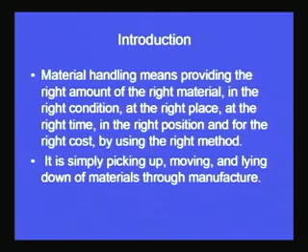From the first slide it becomes very clear what the major objectives of material handling are. We want to transport the right material at the right place, in the right position, in the most cost effective manner, using the right method. There may be many methods of material handling; we may not cover all of them, but it's important to understand there is no single method - there exists a large number of methods used in industry.

We are trying to address what we mean by material handling. It applies to the movement of raw materials, parts in process, finished goods, packing materials, and disposal of scrap. To summarize: right amount of material, of right quality, at right time, at right cost, in the right position and place, in the most cost effective manner - that is the basic crux of material handling. So these materials handled fall under this category.

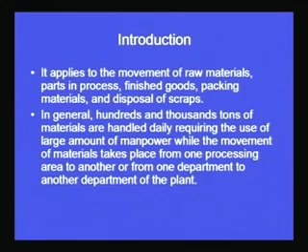In general, hundreds and thousands of tons of materials are handled daily, requiring large amounts of manpower, while movement takes place from one processing area to another, or one department to another. A huge amount of manpower is required to transport material between units, and the volume transported is also very large. If we see the costs involved in this transport, it would be very high.

If we look at the breakup of the total manufacturing cost of a product, some of that cost is contributed by material handling - which is the cost we want to minimize. If that cost is large and adds to the product cost, we would like to reduce material handling cost to a minimum so the overall cost of the product can be minimized.

In the first slide we saw what we mean by basic material handling. Now we've seen what type of materials are transported within the plant - this can be raw material, work in process materials, finished goods, scrap, or other inventory items or equipment transported from one place to another within the manufacturing plant. These activities are usually done manually or by automated systems, and our major objective is to minimize the costs associated with material handling.

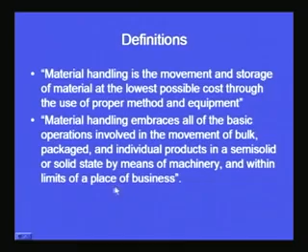If you see, what is the type of material? Movement of bulk, packaged and individual products. These products can be in semi-solid or solid state, moved by means of machinery and within the limits of the place of business. So, with the help of machinery means that manpower may be required, may not be required. So, machines are being used for material handling, and this type of movement takes place within the place of business.

So, the material handling of material outside the business place is not considered in this definition. So, in this definition we see the type of material, the movement of material takes place, and it is done with the help of machines, and the movement of materials is restricted within the sphere of the business activity within the plant. So, we have already seen two definitions which very clearly define what we mean by material handling.

Now, let us see some other definitions which give us the basic meaning of material handling. Material handling is the art and science of moving, storing, protecting and controlling material. So, this gives another aspect of material handling. It is the art and science of moving. Moving we have seen in the previous two definitions also. The movement of materials is an integral part of material handling.

Then storing of material also falls under the broad definition of material handling. Then we have protecting and controlling material. So, we have to protect the material under the broad umbrella of material handling. Sometimes we have to protect the material from different types of insects, different types of hazards, or from different types of unnatural or natural calamities.

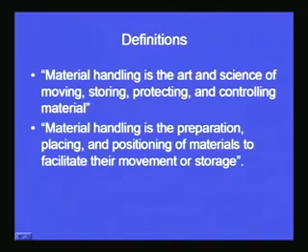Then, material handling is the preparation, placing and positioning of materials to facilitate their movement or storage. So, movement or storage we already know, but it is the preparation, placing and positioning of materials so that they can be easily moved and easily stored. That is also a material handling activity.

So, we have seen different definitions of material handling, but the basic crux is that the material handling activity involves movement of material within a business unit, within a factory, or within a plant. This has to be accomplished at the minimal possible cost and by making use of the most efficient method of movement in order to minimize the total cost, or we can say to maximize the profit of the organization.

Now, what are the objectives of material handling? Let us see. The primary objective of a material handling system is to reduce the unit cost of production. The other subordinate objectives are... as discussed in the previous slides, the cost has to be minimized, the profit has to be maximized. So, the primary objective is to minimize the unit cost, but there are some other objectives also, which we are going to see one by one.

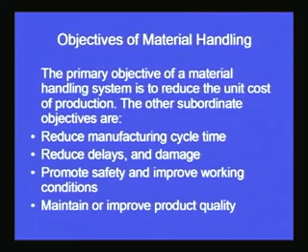So these are the three important points we have already discussed. Now the fourth point is to maintain or improve the product quality. Let's take an example: during handling on a conveyor, material is being transported from one processing unit to another.

Suppose the material has been finished at the last processing point, achieving final finishing of the product, and it is being transported by a conveyor to the packaging unit. If the conveyor is not proper, the materials hit one another. The finished products being transported to the packaging unit rub against each other during this movement, and the surface finish may be spoiled.

So what should be an ideal material handling system? What is the objective of material handling? The product quality should be maintained, or even improved. Whatever quality we achieved in the final section of processing should still be there when we are packing the product. So during this transportation or conveying, the material should not get damaged or lose its quality. Our material handling system design should be such that this problem does not arise.

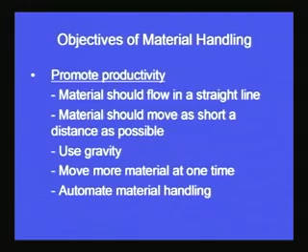During the course of this lecture we would also like to see what are the limitations of automated material handling systems. The advantage has already been addressed in the objectives of material handling, where we say that if we have an automated material handling system, it would lead to promotion in productivity, or increase in productivity. Then what are the other objectives?

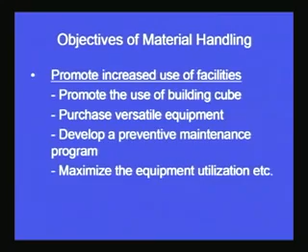So material handling should lead to all these things also. It should promote the use of a building cube, then it should purchase versatile equipment - this is also one of the objectives of material handling. So versatile equipment should be there, not dedicated to one type of product only; material handling can be done for different types of products.

Then it should develop a preventive maintenance program also, that is also very important. If maintenance is not there, then there may be frequent breakdowns. Then it should maximize the equipment utilization. So material handling should also look into these aspects, and the material handling system should take care of all these points. So we have seen the major objectives of material handling.

We have covered so many different points related to the objectives of material handling. We have seen that we keep certain objectives in mind whenever we have a material handling system. These are the aims, the objectives that should be satisfied if we have a very effective and efficient material handling system.

Now we come to another point: what are the costs of handling, or different types of costs associated with handling, and our major aim is to minimize these costs in order to maximize the profit. So the cost of handling is the cost of material handling equipment, both fixed cost and operating cost, calculated as the cost of equipment divided by the number of units of material handled over the working life of the equipment. So first is the cost of the material handling equipment.

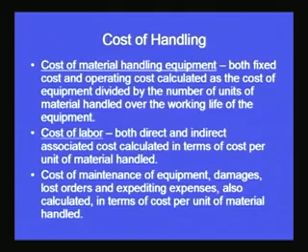Then there's the cost of maintenance of equipment, damages, lost orders, and expediting expenses, also calculated in terms of cost per unit of material handled. So we've seen three different important cost elements in material handling: cost of material handling equipment, cost of labor, and the cost of other maintenance activities, damages, or lost orders.

Now when we talk about an efficient material handling system, we should have a system which is very efficient, meaning it should handle a large number of parts or products, and the cost of that equipment should be spread over a large number of products so that we get economies of scale. Similarly, if we're talking about material handling by equipment, very little labor force should be required, meaning it should be semi-automated or automated.

If we're talking about manual material handling, meaning only people transport or move material from one area to another, we should have a system where the minimum number of people are required to transport material from one area within the plant to another. Our major aim is to minimize the total cost of material handling.

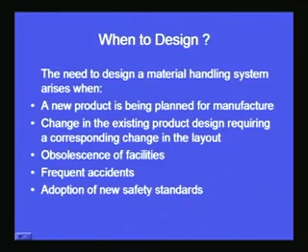The first is when a new product is being planned for manufacture. The company has decided that a new product would be manufactured, so we need to design a material handling system for how that product would be handled at different stages of the manufacturing activity. Suppose it enters as raw material, is processed at different stations, and finally goes out as a final product. We have to decide how the new product would be handled at different stages within the plant. So whenever a new product is introduced, we have to decide that a material handling system must be designed.

Another circumstance is a change in the existing product design requiring a corresponding change in the layout. We've already seen there are different types of layouts: product layout, process layout, fixed position layout, or cellular layout. Whenever a product change takes place, sometimes we may have to change the layout too. Considering the advantages and disadvantages of different layouts, in certain circumstances we may have to change the type of layout. So whenever a new product is launched, we may need to completely redesign the material handling system, and whenever there's a change in product design, the layout changes, and as the layout changes, we have to change our material handling system.

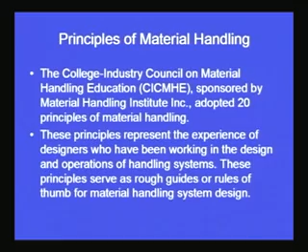So these designers have summarized their experiences related to handling system design, quoted in terms of different principles. We are going to see what these principles are. They represent the summarized experience of designers with a long history in the area of material handling system design, and serve as rough guides or rules of thumb for material handling system design.

So we have seen where these principles come from, how they have been formulated, and how they can be used. They are just rules of thumb, which may or may not be used. Now we will go through these 20 principles one by one, and address one or two of them in detail.

Then the simplification principle: the material handling system should be very simple in nature. If it is very complex or cumbersome, it may result in damage to the material during handling. A simplified system makes the overall manufacturing system very simple, so the principle of simplification should also be taken into account.

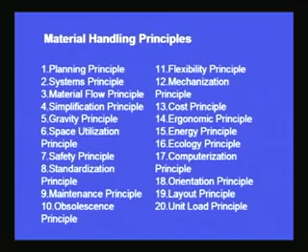We have seen that in one lecture we cannot go into discussing all these principles, but an overview has been presented here, that whenever we design a material handling system, we have to take into account all these principles.

These principles are basically rules of thumb which may be applicable in a particular system or may not be applicable in a particular system. But if we take into account all these principles while designing our material handling system, this is going to lead into a design of a very effective and efficient material handling system.

Effective and efficient means it would require less space, minimum amount of energy to operate, it would be very easy to operate, it would have smooth flow, and all other principles incorporated into a very optimal material handling system.

So if we design a system which is optimal, efficient and effective, this would further lead to minimization of manufacturing cycle time. This would reduce the total cost of the product, and in turn result in maximization of profit. So manufacturing cycle time is reduced, cost of the product is reduced, and profit is maximized. Every businessman, entrepreneur or organization head would certainly like such a material handling system. We would be able to achieve that kind of system if we take into account all these principles highlighted on this screen.

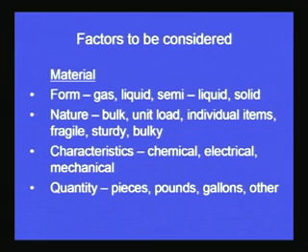Quantity also plays a very important role, whether it is pieces, pounds, gallons, or otherwise. What is the quantity that has to be transported is also very important. So from the materials perspective, we have to take into account the form, the nature, the characteristics, and the quantity of the material that has to be transported from one area to another.

Now let us see from the movement point of view what factors we have to keep in mind. We have to see source and destination, receiving, stock room, warehouse, same floor or maybe another floor, other department. We have to see what is the source and destination of the materials, from where the material has to be taken and where it has to be delivered or transported.

Then the route, which route it is going to follow, the location, range, what is the path it is going to follow, and the cross traffic. Sometimes there may be cross traffic also, where material is moved from one place to another while there is a cross movement of another type of material being handled from some source to some destination.

So when movement is being considered, we have to see what is the source and destination, what route the material is going to follow, and the distance—horizontal, vertical, or inclined. So route, distance, source and destination have to be seen, and the frequency also has to be seen.

That is, whether it is intermittent transport or uniform transport. Whenever it is uniform, we may think of putting up a continuous conveyor belt, because continuously we are transferring material from one place to another. It can be regular, irregular, or unpredictable. So we have to see how the material is being transported, what is the frequency of transfer.

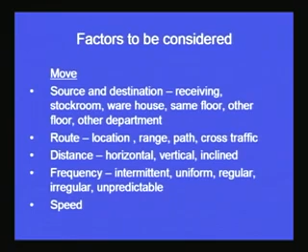So whenever we design a material handling system, we have to take into account the material itself, what has to be transported. Then we have to address the movement points. And finally the methods, unit or load—maybe bulk items are transported, or containers are transported, or a big container is transferred from one place to another within the business activity.

Then manpower has to be considered, like how many people would be required—one, several, many, or none. This is also one of the important aspects in designing the material handling system. Then the equipment, whether we go for a conveyor, forklift truck, or crane, this also has to be taken into account.

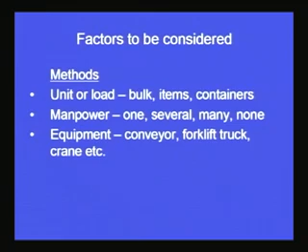So we have seen the various factors that have to be taken into account whenever we are designing a material handling system. These factors can broadly be categorized into material aspects like type and form of material that has to be transported, along with many other factors. We also have to take into account the movement, including speed, frequency of travel, and related aspects. Depending upon the movement, the type of material, and the kind of methods we can use, we can have a large number of material handling systems. If we take into account all these factors while designing the system, it would result in the optimal transfer of materials from one place to another within the organization.

We have seen that so many different types of material handling systems are there. So we take into account all these factors, which we have covered in the previous three slides specifically, and these factors would lead us into designing a particular type of material handling system.

We have seen that automated material handling systems had certain advantages. If we remember, during the objectives of material handling, we saw that improving productivity can be easily achieved with the help of automated material handling systems. But these types of systems had certain limitations as well. So what are these limitations?

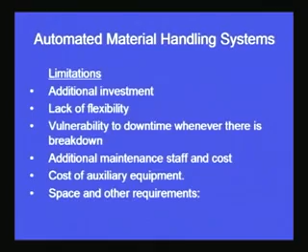So although these types of systems are very efficient and effective and improve productivity, they have certain limitations as well, which have to be taken into account. We have to do a feasibility analysis, a cost-benefit analysis, to determine if spending so much money installing an automated material handling system is worth it, or if it is reducing the per unit cost of the product.

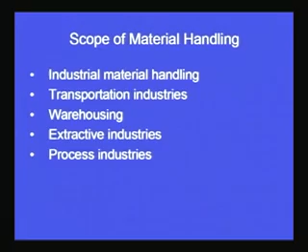The scope of material handling is very wide. It can be industrial material handling, which we have covered a little bit in today's lecture. It can also apply to transportation industries, warehousing -- wherever we are maintaining a large amount of inventory, maybe of finished products -- and extractive industries, process industries. So different types of industries require material handling. Whatever topics we have covered, our discussion and examples were focused on manufacturing industry, but the aspects of material handling are very open and general in nature. The factors we considered for designing an efficient and effective material handling system are very general and can be used in any of these types of industries.

So we have covered in today's lecture the basic definitions of material handling. We have seen the principles of material handling. We have also covered the various factors that have to be considered for designing an efficient and effective material handling system. Thank you.